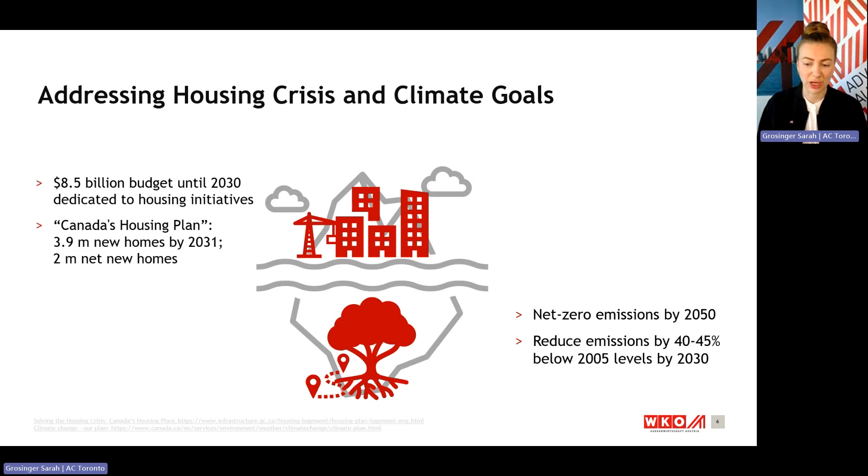Now, how are these challenges and goals intrinsically linked? The crucial connection that often gets overlooked is the intricate relationship between climate and housing. When we factor in materials and construction emissions from the building sector in Canada, they make up approximately 30% of the nation's total emissions, which, to my surprise, rivals the figure of emissions from the oil and gas industry.

Usually, the first things that come to mind when we talk about greenhouse gas emissions in buildings are likely factories or other large-scale economically operated buildings, while in fact a staggering 97% of building emissions are caused by residential buildings, primarily through energy consumption.

Particularly residential buildings play a pivotal role when it comes to greenhouse gas emissions. To put that into perspective, in Canada alone, approximately one quarter of all energy consumed is dedicated to running households, which is a considerable chunk of energy usage directly linked to homes.

And despite political differences, there's a resounding acknowledgement across party lines regarding the severity of both the housing and the climate crisis, whereby both the Conservatives and Liberals alike are advocating for aggressive solutions.

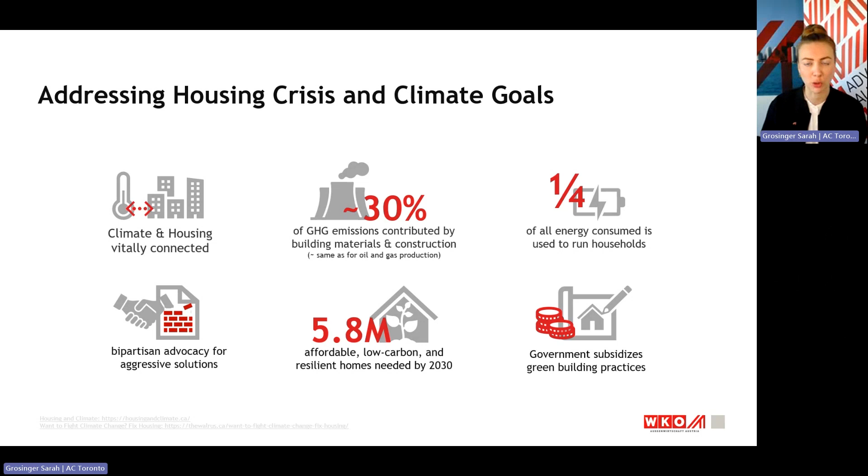The expert panel, called the Housing and Climate Council, has put out a roadmap stating there is a need for even 5.8 million low carbon, affordable, and resilient homes to be built by 2030, which is more than the Canadian Housing Plan has targeted so far. There are currently a lot of government subsidies to advocate for green building practices and make sure they can be sustainably applied.

Now we've seen the challenges. Let's shift the focus to the opportunities arising from these challenges.

The Canadian housing innovation sector is currently fueled by significant investments. Over 600 million Canadian dollars are allocated by the government currently towards innovative housing technologies as well as materials. These consist of the establishment of a 50 million home building technology and innovation fund.

This fund basically opens doors for collaboration and commercialization of advanced housing solutions, which might be particularly of interest for firms specializing in prefabrication, mass timber production, and 3D printing. These companies can leverage this fund to enter the Canadian market and showcase their experience.

Another 500 million are allocated for new rental housing projects, which present businesses with a prime opportunity to showcase their capabilities in prefabrication and modular construction, as there's currently significant demand for solutions that streamline construction timelines and enhance efficiency at the same time.

And last but not least, the launch of the modernized housing design catalog is supported by a budget of roughly 12 million, or 11.6 million Canadian dollars to be exact. This catalog supports companies that specialize in modular homes, row housing, fourplexes, basically providing a platform for these companies to showcase their designs and technologies, and is aimed to really streamline housing approvals and construction timelines.

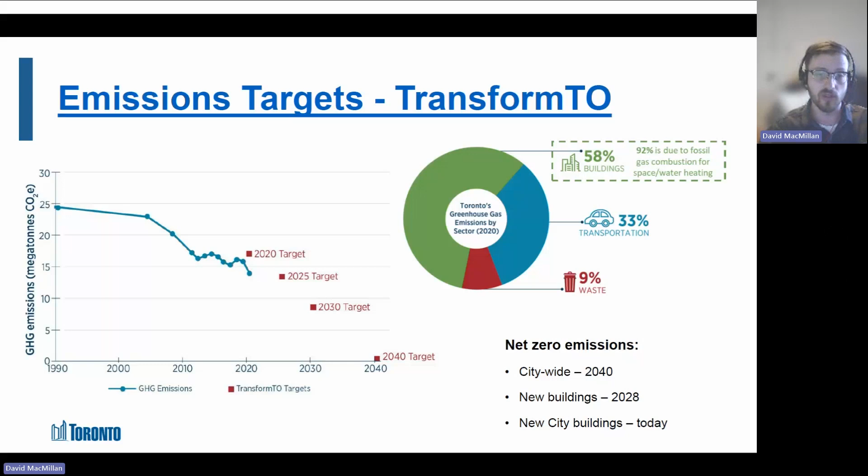So we're now in version 4. Starting in 2025, our council told us we need to accelerate the carbon target specifically. So we're actually accelerating the Toronto Green Standard to go even faster. This is how we're going to get to net zero new development by 2028, which is only a few years away. Given the development cycles in Toronto, that means developers now need to be planning for that reality.

So we also have really ambitious housing targets, and I'll just give a brief overview of these. Basically, we've committed to the provincial government that by 2030, we'll deliver almost 300,000 new homes. Within that broad category, council has directed us to deliver 65,000 rent-controlled units, and that's a mix of affordable and market.

The point is that's 65,000 units delivered within the next 5 or 6 years, many of which need to be affordable. Specifically, we're talking 25,000 rent-controlled homes, a huge portion of which are non-market, and there's a cost to do affordable housing. So I don't want to downplay how significant of a challenge this is for the City of Toronto.

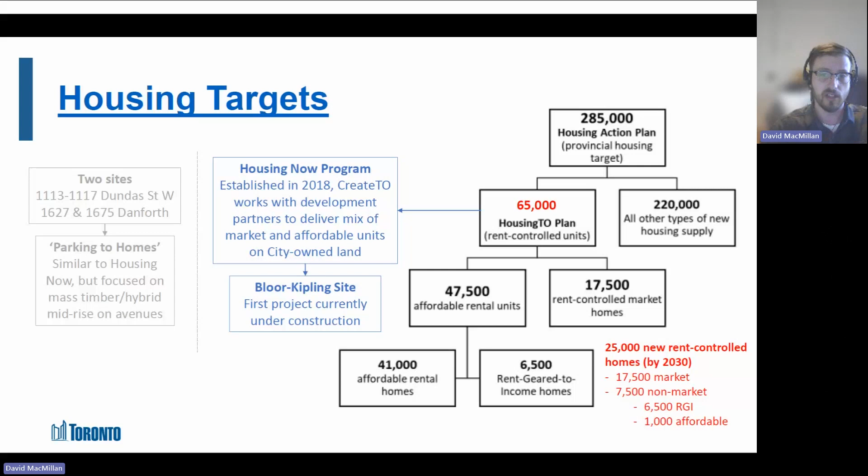So what does Housing Now look like in practice? This is our first site, Bloor Kipling, in the west part of Toronto. We recently broke ground on our new civic center, and the first housing block, Block 1, is under construction right now. So this is the first site that's underway several years later, but we're really excited about it, because we're going to be getting almost 3,000 new housing units, including a large portion of affordable units.

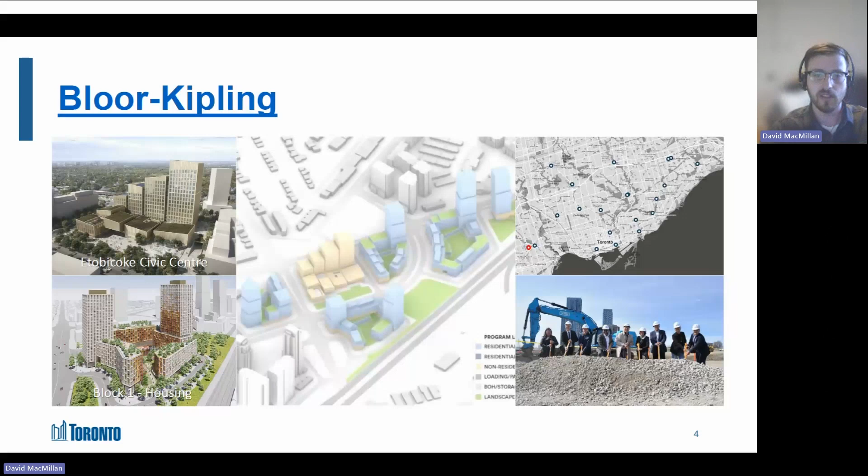From my perspective, this is how we address housing and climate in the same vein, because the Civic Center will actually be hosting a district energy plant powered by, or with heating and cooling provided by, a geo-exchange system that will serve all 3 million square feet of the entire precinct. So this is how we, on city land, deliver affordable housing that is also low carbon. But in this case, this development was planned years ago.

We're actually not accounting for embodied carbon, which is a huge part of the story now. We have a very clean grid in Ontario, which we're very fortunate to have. That really means that as long as we electrify heating and cooling, like with GeoExchange, we're essentially avoiding operational carbon. Problem is, we're not accounting for the embodied carbon, the carbon in materials, which Sarah spoke about earlier, which it's not in our inventory, but we figure it's another 1 million tons of CO2 per year, which our inventory is around 15 million. So it's a significant portion of carbon.

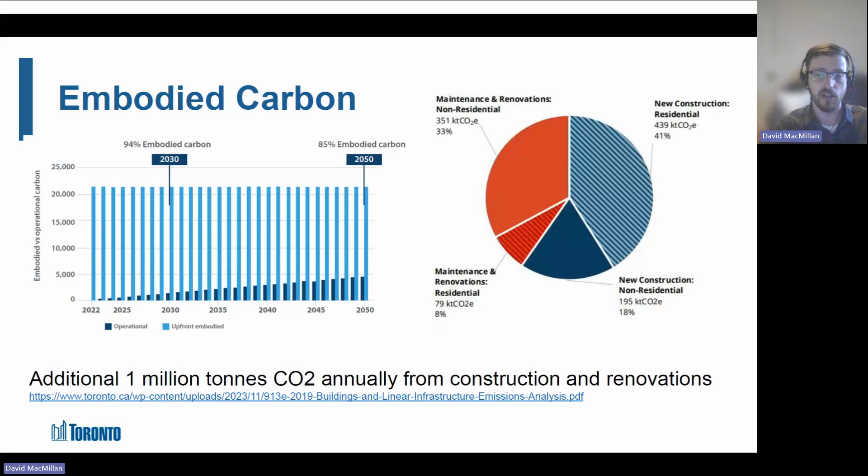So a couple of years ago, we started down the path of at least understanding what embodied carbon looks like in Toronto, and maybe taking a first step to address it. This presentation, by the way, is full of links, so you can definitely read up on these studies. But the point is, these were our first endeavors to actually start regulating embodied carbon in new development.

This slide is meant to indicate that we now have targets in our Toronto Green Standard. For the industry, they are voluntary because they're new, though with the next version of the TGS we'll also look at making them mandatory. The point is that they are quite aggressive. For the city, we're actually making them mandatory starting now.

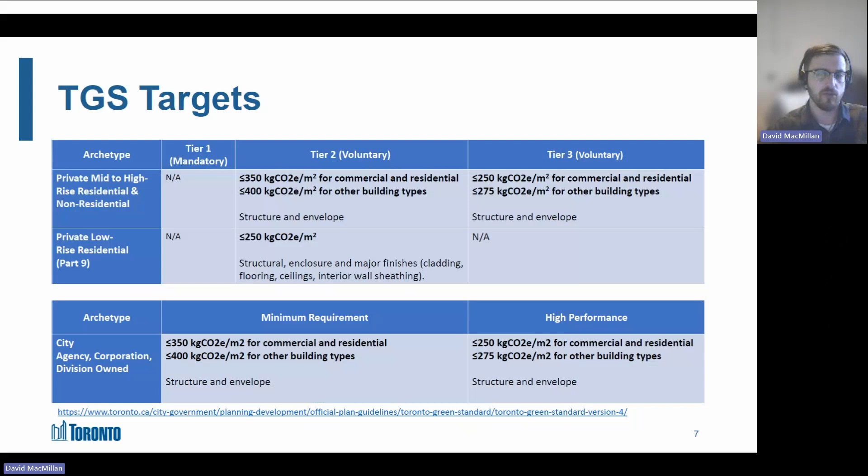So we are leading by example to try and do low embodied carbon development for any city-led projects. One of the obvious examples, because we've seen it elsewhere but it's new for us in Toronto, is mass timber housing, particularly mass timber structures, because structure is about 60 to 70% of the embodied carbon of a residential building, at least your typical concrete building.

The other advantages of mass timber: right now, depending on the building design, it's definitely faster than concrete. It can actually be more cost effective. Right now formwork in Ontario is actually very expensive, driven in large part by cost inflation and the fact that those trades are very busy delivering not just housing but all kinds of infrastructure. The other advantage with mass timber structures is they're so light you can really minimize below grade work where there's a lot of cost and carbon.

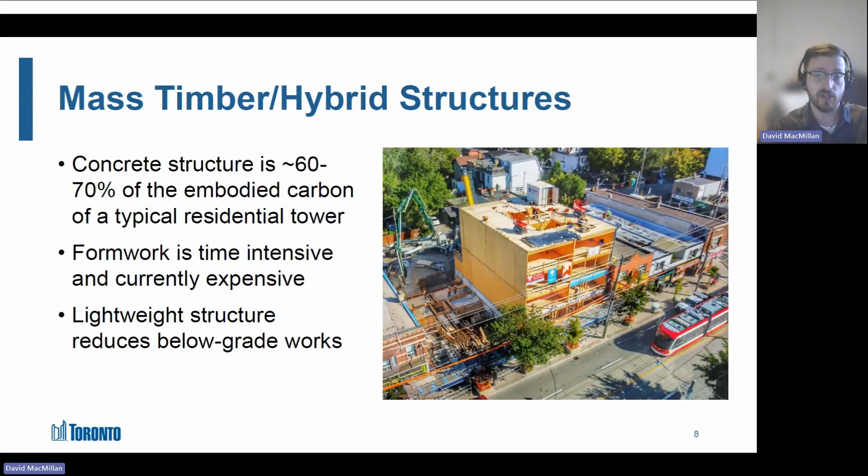And in Toronto we no longer have minimum parking requirements, so you can essentially do slab on grade construction, which really is an advantage for mass timber.

So a couple of years ago, we set out to do our own projects in Toronto. Again, these are city-led projects on city land, working with our development partner, CreateTO. We set out to do our first mass timber affordable housing projects.

On the left there are two mid-rise projects that we are advancing, one on Dundas Street and one on Danforth, two of our main avenues. And then on the third, there is a design we just tried to do, essentially an 18-story timber hybrid building. This was a couple of years ago.

Fast forward to today, which I'll speak about a little bit later, and 18 stories is soon to be allowed in building code for mass timber. So it no longer necessarily has to be a hybrid, although for design reasons it likely will be. The point is, we are advancing these projects because we want to prove out the case for low carbon affordable housing.

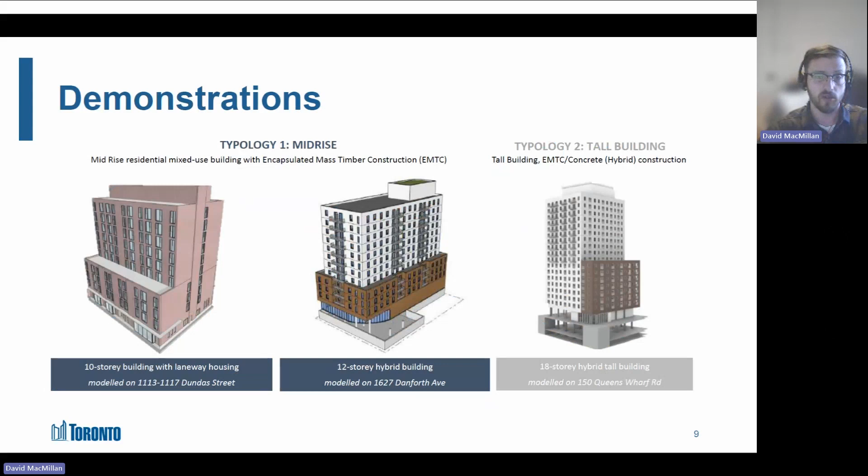So this is our Dundas project. This is in for rezoning, which is almost complete. We'll soon be going to market for a development partner and hopefully under construction by the end of the year. This is a 10-story building on the avenue, slab on grade, as I mentioned.

Only one step back, which I won't get into the details of, but this is a bit of a departure from traditional mid-rise on the avenues in Toronto, though I think it reflects where we're headed as a city. So we're using primarily cross-laminated timber for the floor, roof, and wall panels.

Right now we're planning to expose 25%, but through the building code alternative solutions process, I think we'll look to expose more because it's a beautiful material that we want residents to enjoy. The structural support is largely glulam beams and columns. Because of lateral strength requirements, we are at this point designing for a steel core, but obviously there's plenty of innovation happening that in the future might allow us to do an all wood building more cost effectively.

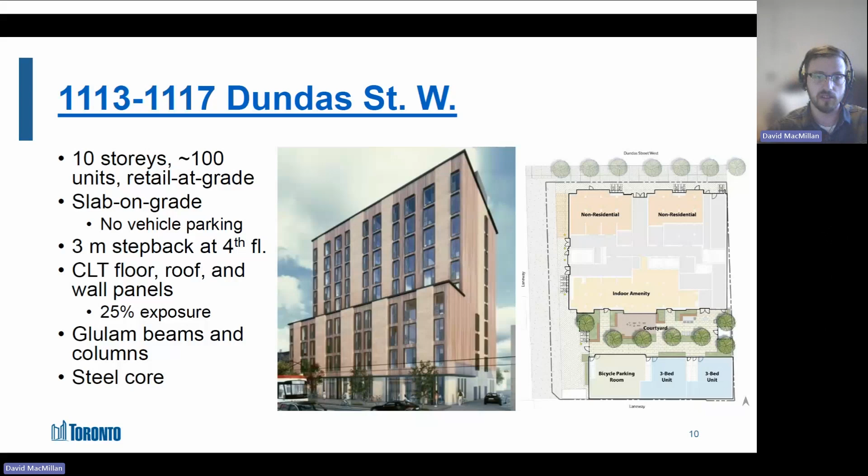So in terms of housing and climate, where it comes together, when you look at the preliminary embodied carbon assessment, we're at 218 kilograms of CO2 per square meter, which is extremely low relative to a concrete building, which is typically 400 to 500. And we are not counting the biogenic carbon, the ability to sequester. But in a future scenario where we have some sense of control of what happens at end of life, if we were to count that biogenic carbon, this would be a carbon negative structure at least.

And we haven't gotten to the envelope design yet, so of course there will be carbon associated with that. But in terms of the structure alone, this is the kind of building that can actually reduce net emissions.

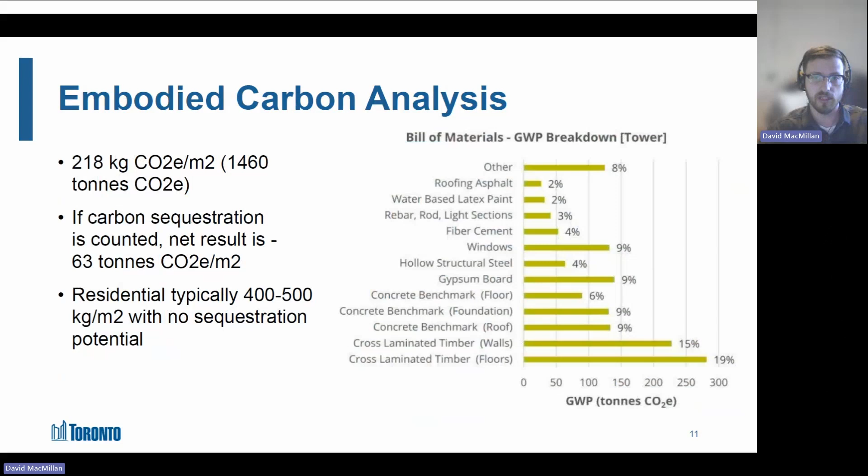So at a high level, based on the analysis we've done so far, we can get to net zero operational emissions for about a 3% cost premium on capital. The mass timber structure is actually on par with concrete today, which is amazing. It was not what we expected when we started this project. Again, slab on grade construction, minimal concrete use, and it goes up quickly. So the business case is solid.

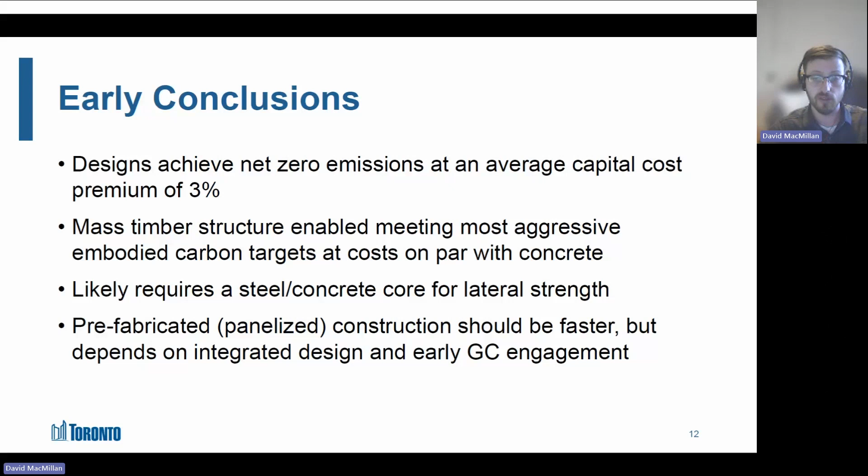Again, likely a steel core for lateral strength. And really, this will be a prefabricated construction because that's how we'll be able to do this quickly and cost effectively. So what does this look like in terms of a program? I think we're looking primarily at avenues, but again, mid-rise buildings.

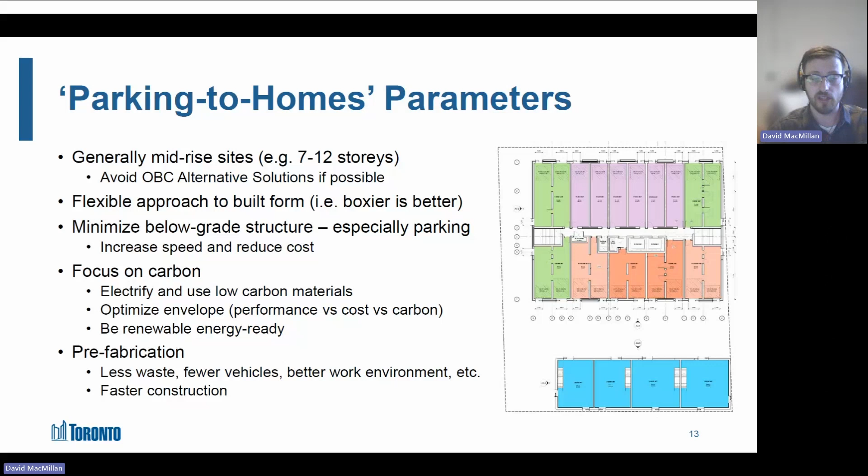I think we're going to be going to 18 stories in the building code, so we'll start to be able to do towers as of right in timber. We need to have a flexible approach to built form, so boxier buildings are better. No parking, ideally. Focus on carbon and optimize for that, and then enable prefabrication for sure. It's faster and less waste.

So I just want to now quickly go through a few more slides on the housing approach. We are taking the lead as a public builder now in Toronto. It's a new endeavor for us, or at least new in my lifetime, where we're going to be starting with 5 sites over the next few years, scaling up very quickly after that to any city-owned projects. All of these buildings have to have no fossil fuel use.

And because we want to go quickly, I think there's a huge opportunity for mass timber. So these are the first 5 sites, and I've just given you some details to give you a sense of maybe how they'll be built. Dundas is on there, which is going to be mass timber. There's a couple of smaller projects where there's potential for hybrids of mass timber and light wood framing, which may be the optimum in terms of cost and speed.

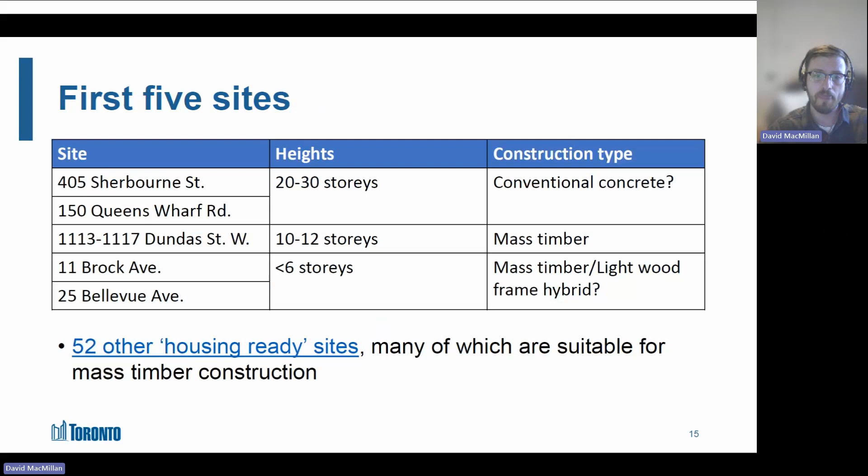This is the one we're working on at that scale. It's a 6-story, 30-unit building, again on city-owned land, on a parking lot. We haven't designed it yet, only at a high level, but we're evaluating a mix of cross-laminated timber floors and light wood framing—basically traditional framing for the walls—because it looks to be the best combination of speed and cost, at least on paper.

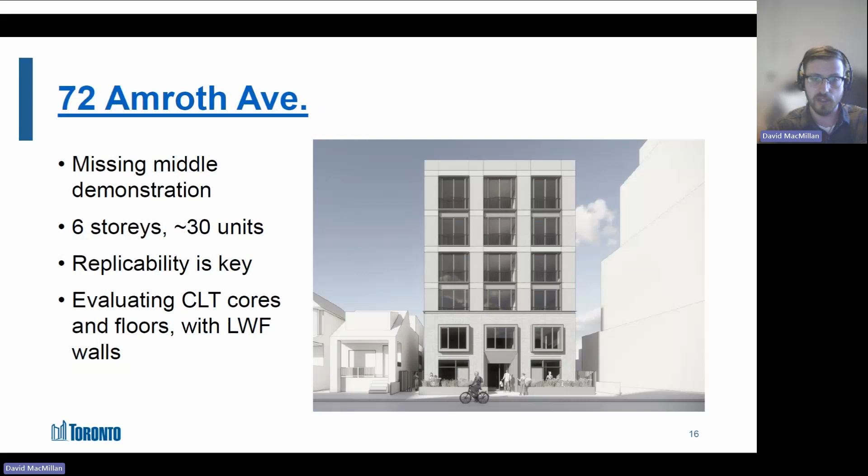But this is the kind of infill just behind the avenue, behind like a Dundas site, where we're transitioning to what you might consider more traditional neighborhoods. But this is an important housing solution too, especially for families, where we can deliver often larger units in this typology. So very quickly, I think how we scale up really is the big question for me.

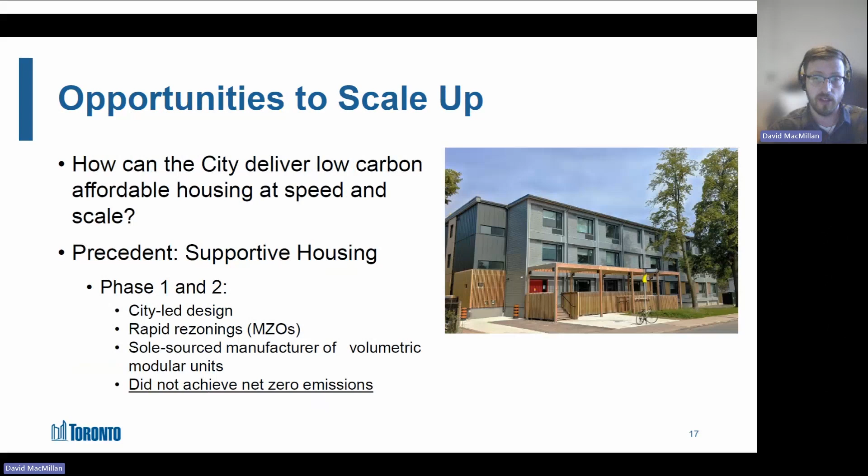So we have some examples with our supportive housing program, which was federally funded and delivered rapidly, but these were modular, volumetric modular units. I don't think this will scale to larger buildings, and they did not achieve net zero emissions. So for phase 3, we're setting out parameters so that we do achieve net zero emissions, with a model that doesn't necessarily require modular, that enables panelized construction and the use of mass timber. That is something that will scale to larger buildings.

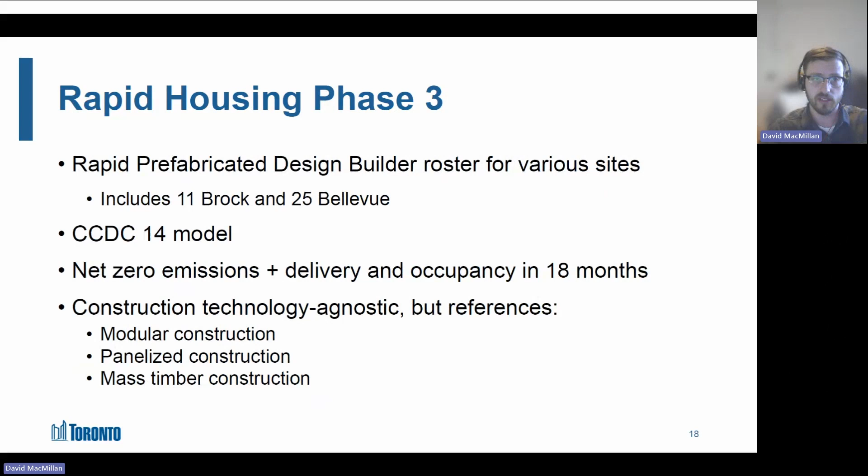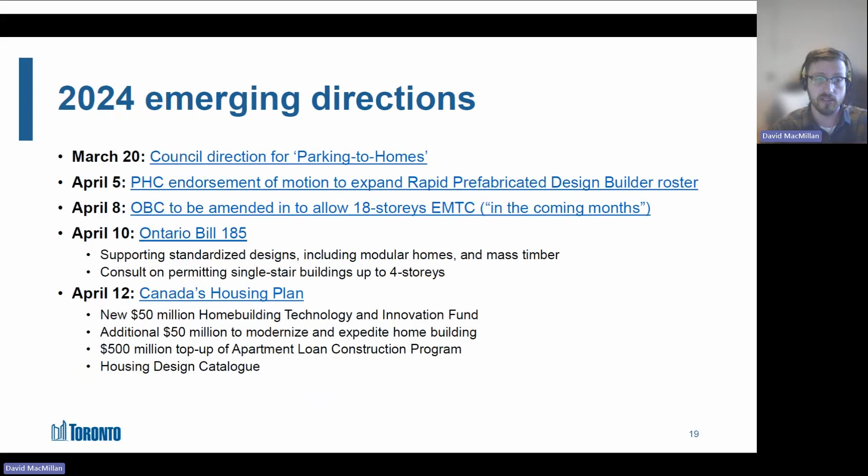And so this is all not happening in a vacuum, and Sarah mentioned some of these things already, but we have direction now to proceed with parking to homes. We have endorsement to expand our roster of prefabricated design builders. The building code is going to 18 stories for encapsulated mass timber. We have the province and the federal government both endorsing pre-designed buildings, prefabrication, and the use of mass timber. So government at all levels is behind this, which is great.

I think we need strategic alignment with our funding partners because funding is critical, especially for not-for-profits. We need to be able to do rapid design iteration and fast approvals. That's key. So when we talk about a design catalog, it needs to be also rapidly approved by municipalities. So ultimately, we want to see factories here. We want to see distributed manufacturing. We want to see companies investing here to deliver these buildings because that's how we'll scale. The city will do its part, but we need private sector partners to help with that.

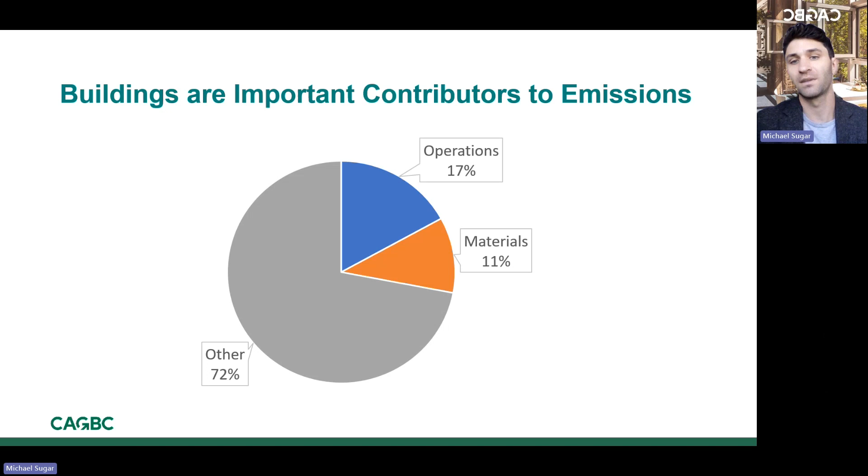Accounting for an estimated 11%, so in total we're looking at just shy of 30% of emissions. Canada's National Inventory Report was just released for 2024, for the reporting year of 2022, last week. Actually, buildings crept up above the transportation sector as the second highest emitter after oil and gas. This is largely a result of post-pandemic lifestyles, people not necessarily commuting into work anymore. So we can't hit our carbon pollution targets without addressing buildings.

In an effort to slash emissions, as Sarah noted, by 40 to 45% below 2005 levels by 2030, the federal government announced some $9.1 billion in investments that will, among other things, boost incentives for zero-emission vehicles. There'll be sweetened tax breaks for companies in the fossil fuel sector to deploy carbon capture, utilization, and storage, or CCUS technology, and also to clean the electricity grid. But there is a massive component for greening the building sector as well, as it is now the second or third leading emitter, depending on which year you're looking at.

So for Canada to achieve its 2030 and 2050 climate targets, building owners and operators will need to upgrade, retrofit, and ultimately decarbonize hundreds of millions of square meters of buildings in the next 5 to 10 years. But into 2050, it seems like a very large scale and problem to solve.

I don't want to get too much into the climate science here, I want to get into buildings again, but this is what the IPCC refers to as the remaining carbon budget. I've selected 500 gigatons of CO2, which gives a 50% likelihood of keeping within a 1.5 degrees Celsius global warming trajectory. Essentially, if we pull down on the first graphic here...

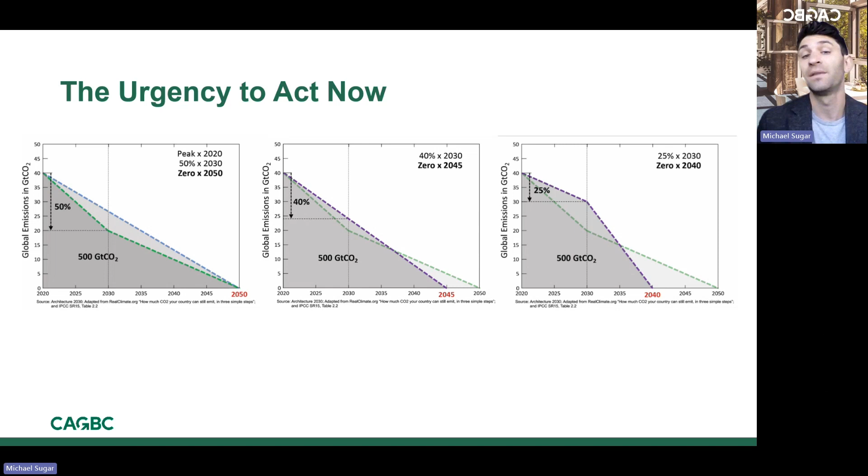And just to illustrate this point, if we only reduce our emissions by 25% by 2030, then we have emitted more carbon and eaten up more of our remaining carbon budget than we should have. So that purple line is now at an even steeper incline, and we have to hit net zero to stay within 1.5 degrees Celsius by 2040.

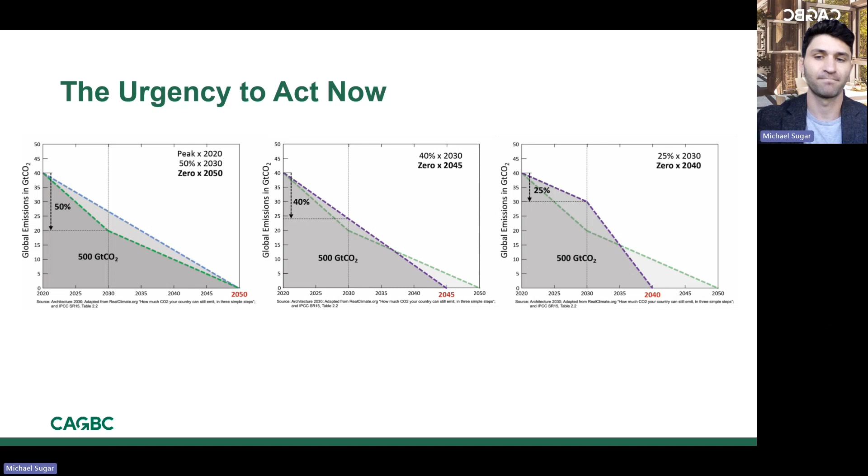So that's the climate science and the motivation. Moving into our rating standard and why it's important: what is a zero carbon building? With definitions, I like to just read them and not ad lib.

A ZCB is a highly energy efficient building that produces on site, or procures, carbon-free renewable energy or high-quality carbon offsets in an amount sufficient to offset the annual carbon emissions associated with building materials and operations. I have to stress this: one of the main reasons carbon offsets are allowed in the standard is to allow for the offset of embodied carbon. Because without them, as David showed, even with a mass timber building, your embodied carbon intensity is still around 200 to 250 kilograms of CO2 equivalent per meter squared. So it would be impossible to reach net zero carbon today with today's construction and building material industry as is.

But as we are seeing today, this is really changing quickly.

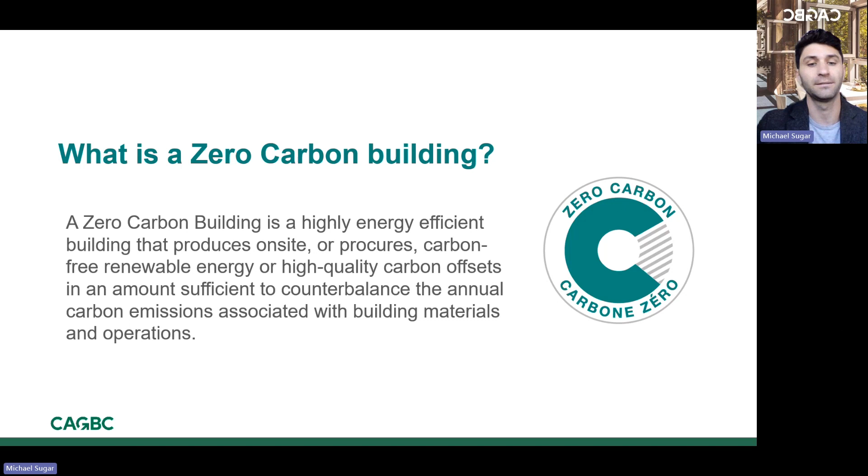On April 12th, the federal government released Canada's housing plan. We heard about this in the past two presentations, but one particular statement in the plan we'd like to amplify in violent agreement is that buildings that are energy efficient and climate resilient can help reduce the lifetime cost of maintaining a home by lowering utility bills and insurance costs.

That is very true. We'd like to add on to that and ask, what about the way we build our buildings and resilient housing? The plan also contains a few investments that will have a positive impact on innovators within prefabricated construction, modularity, and even 3D printing.

So $50 million of that is apportioned for the Home Building Technology and Innovation Fund, to help scale up, commercialize, and promote the adoption of innovative housing technologies in Canada's home building industry. Some of the projects we've certified through the ZCB program have actually sourced their mass timber from Austria, which is an interesting closed loop system.

There are tremendous opportunities for investment in this space in Canada around the energy transition and also the way that we lower our embodied carbon of new buildings.

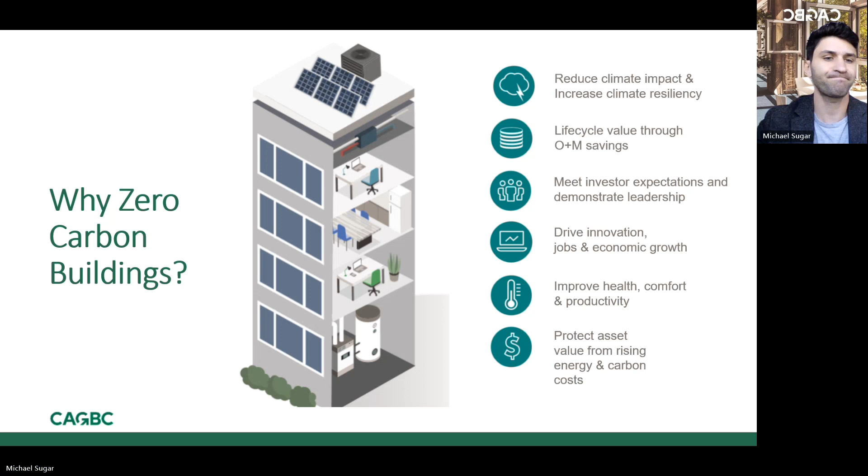We are the third-party verifiers who look at the utility bills from a building and show that they have effectively offset, either through avoided emissions, carbon offsets, or renewable energy credits, their annual emissions.

So just to touch on how we calculate a zero carbon balance, the net emissions are equal to the embodied carbon, so all the emissions from constructing and sourcing materials and manufacturing a building, plus the operational carbon through the life cycle of that building, which in Canada we typically use 60 years. I think in Europe they use 50 years. And inside of that we include direct emissions, so on-site emissions from the combustion of fossil fuels, natural gas for heating, and it also includes indirect emissions from Scope 2 emissions from purchasing electricity where the emissions are offsite.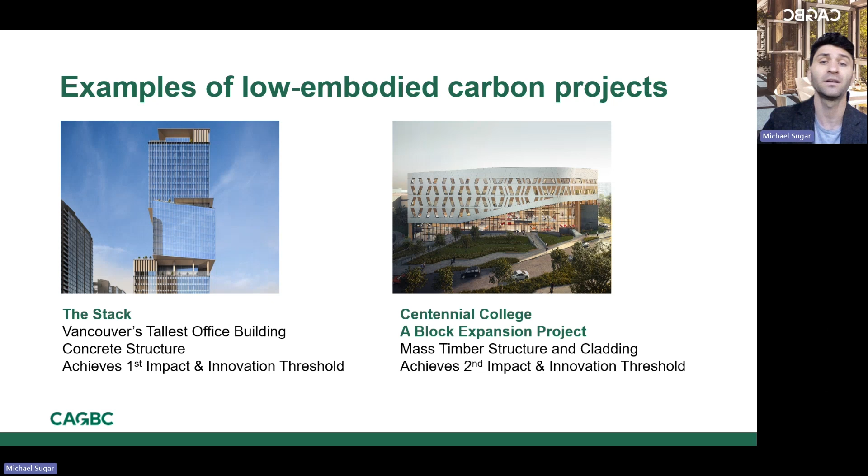On the right, we have Centennial College A block expansion project. This is an image I'm sure you've seen before, we showcase it quite often. It is a mass timber structure and cladding entirely. It achieves the second impact and innovation threshold, meaning that, as David had shown, mass timber projects can hover around 220 kilograms of CO2e per meter squared. So these are some exemplary projects deploying mass timber.

But today, neither of those are housing. I'd like to focus my last few minutes on what we recently certified in Winnipeg, Manitoba. This was the first project in Canada to certify to ZCB Design V3. It is an affordable housing 21-story complex in the downtown Winnipeg zoning sector. At CAGBC, we're the second leading country in LEED certified space after mainland China, and I always get questions, why are you focusing on ZCB and not LEED?

You have so many examples of LEED, but I think it's an important symbol to show that in Winnipeg, a very cold climate in climate zone 7, was able to achieve a 21-story all-electric BIPV clad non-mass timber building that has 214 units. Of them, 86 units are for affordable housing. I'll get into the specifics around the funding opportunities and the capital that this building was able to attract from the federal, provincial and municipal governments. But it's a significant milestone for Canada.

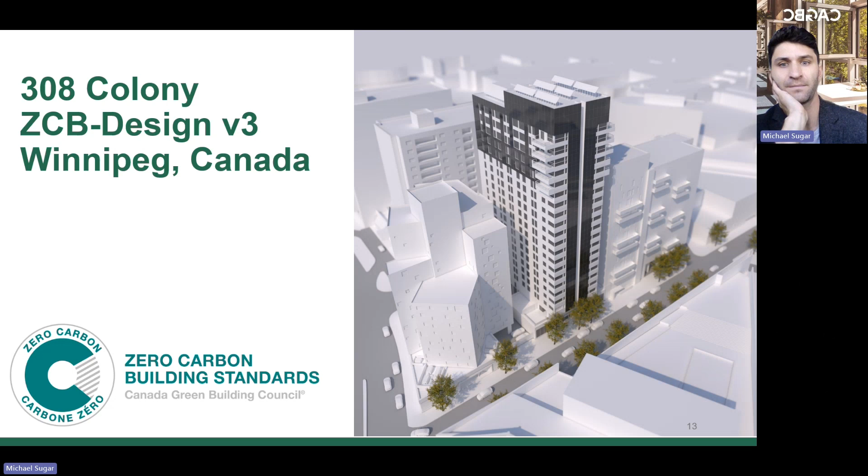Okay, the design process for this building. It was a challenge because they had specific goals for implementing special systems to help the building meet and exceed the threshold required for CMHC MLI Select and new building program support. So I had referenced the Canada Mortgage and Housing Corporation program, which is a way for owners to attract capital to lower the upfront capital for building to a zero carbon design standard.

As such, they were actually targeting a low EUI as part of that goal, specifically an 80 kilowatt hour per meter squared energy efficiency rating, which is very good for a multi-unit residential building. They were also targeting a 40% improvement over our national energy code for buildings in Canada, which is NECB 2017. These were required targets to secure the CMHC MLI Select funding.

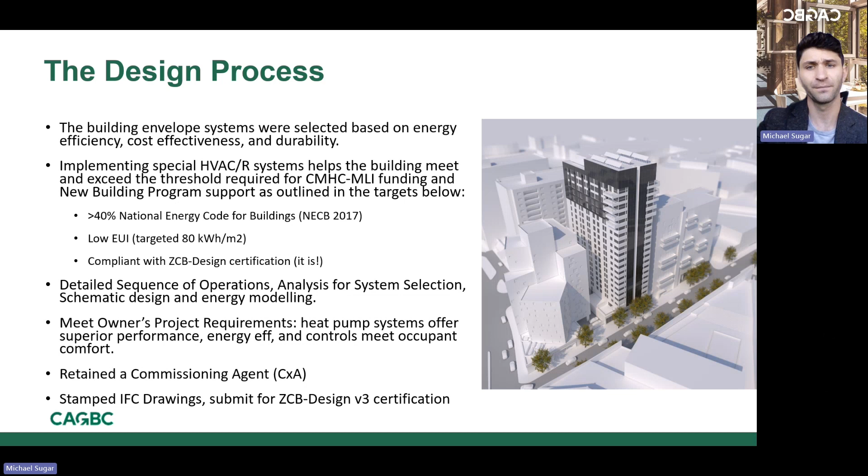The building is currently under construction, as you can see. It's a 21-story, 214 units of mixed income housing, with retail on the main floor.

It is a fully electric building, clad in on-site renewables that account for over 9% of its total energy use in any given year, which is unique given the high energy demand for a multi-unit residential building. It is in a cold climate, which means that in the winter, to heat these units and to heat

the domestic hot water requires a lot of energy as well. So they were very adamant about installing building integrated photovoltaics to supplement that high demand. However, most of that demand is in the winter when the solar is probably not generating as much as it typically would in the summer.

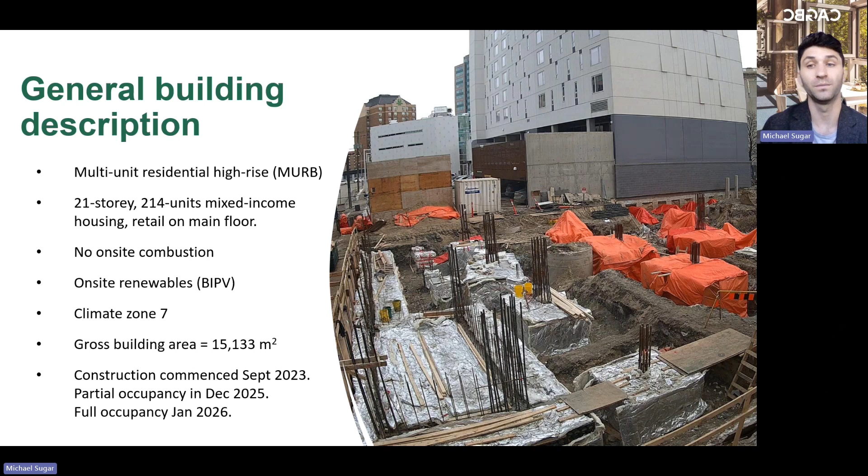So they still have their challenges and are drawing on a lot of electricity during the winter. The gross building area is over 15,000 square meters, and construction commenced in 2023. Partial occupancy is in December 2025, so they're a few months away, and full occupancy will be January of 2026.

I just want to highlight some of the key building performance targets that I think are really impressive for a multi-unit residential building. When you account for the BIPV, I want to note this first row here—they actually came in just 3 kilowatt hours over their goal of 80.

However, in Canada, we don't typically account for renewable energy in EUI. So their EUI is 96.7, which is still fantastic for a multi-unit residential building—it's in the 95th percentile in terms of scoring. Its thermal energy demand intensity, or how efficient it is with its heating and ventilation systems, is 39. This is slightly over our target for Climate Zone 7, but since they're all electric, they were able to

avoid this TEDI target. Their whole life carbon, an important metric emerging in Europe—5 kilograms of CO2e per meter squared per year is sort of the holy grail—this project actually came in below that. It's a function of adding up your embodied carbon and your operational carbon and dividing it over the life cycle of the project, which is 60 years in this case.

One last point before we move into questions: this is not a mass timber project. It's concrete, with a lot of glazing—the window to wall ratio is 29%. However, through low carbon concrete mixes, this project was able to hit an embodied carbon intensity of 275 kilograms of CO2e per meter squared, which is incredible.

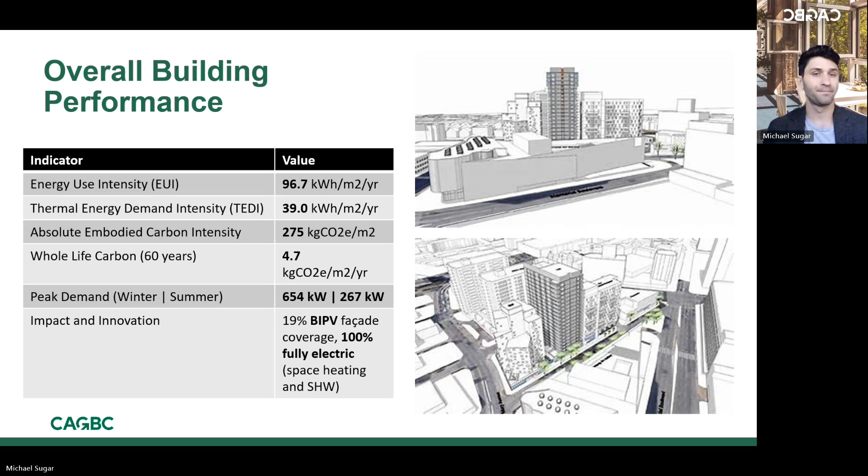I will fly through this and wrap up because we are getting low on time. Just one last slide on embodied carbon. We encourage all of our projects to perform a whole building life cycle assessment to understand what the emissions from embodied carbon are to construct this building.

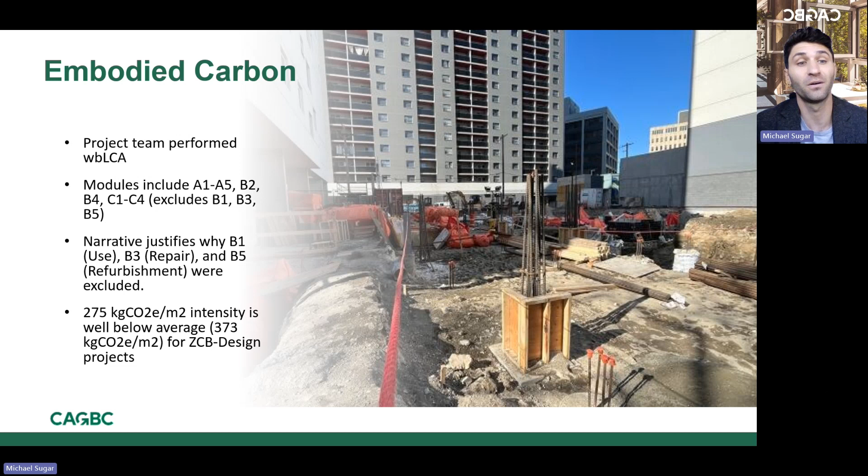I probably don't have enough time to get into how LCAs work, but the average embodied carbon intensity for our program is 373. So this project, a 21-story multi-unit residential building, coming in almost 100 basis points below that was, to me, significant.

It's part of 4 other towers being developed in that same zoning sector. The project confirmed $200,000 through the FCM program, $150,000 in development funding through the CMHC, and $16 million in federal government funding. It received $2.73 million under the Manitoba Works Capital Incentive Program, a provincial program. And through Affordable Housing Now, the City of Winnipeg is also providing tax increment financing to 308 Colony for up to $5 million over 25 years.

So lots of public sector involvement in this. One thing we need to see in Canada is how the private sector doesn't need to rely so much on public funding and financing. We need to unlock more capital through private sector investment that will drive the change we need to see in order to reduce our environmental impacts and also scale up affordable housing across the country.